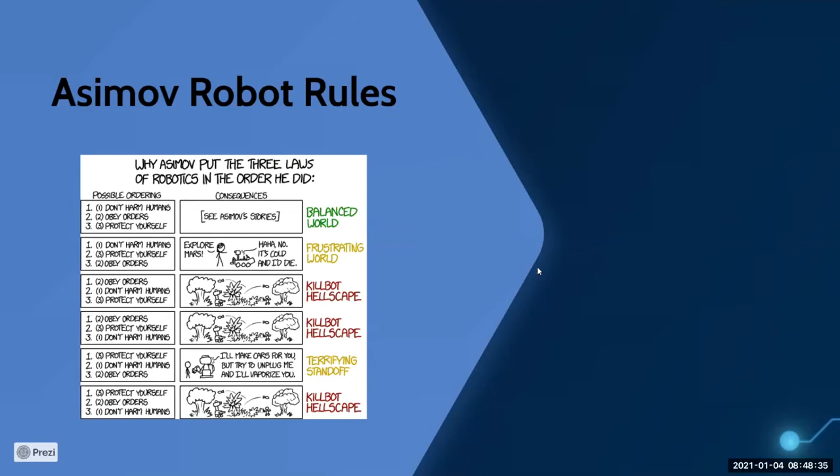Today we will talk mostly about how robots are built and work. I'll make an introduction to these 2 topics, and my friend will give more details in their speech. Building a robot at its base has 3 different parts: mechanical, electronical, and control system.

Mechanical systems are like the musculoskeletal system of the human body. Mechanical systems perform tasks by getting commands from the control systems and electrical systems. While building a mechanical system, designers consider the project's requirements about size, force, and toughness. I'll give a few examples about robotic arms. Different robotic arms need different motor forces—surgical robotic arms need more precision than force, while car assembly arms need more force.

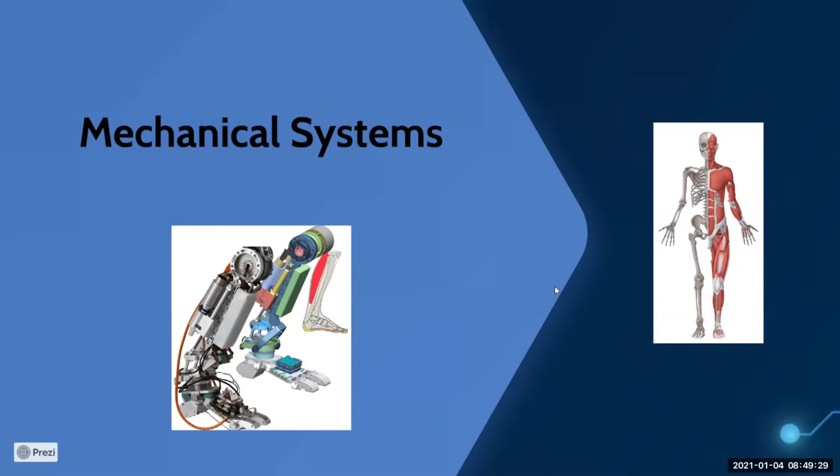Electrical systems are like the nervous system of the human body. They create, communicate, and process electrical signals between parts of the robot, and they include sensors to understand environmental conditions like distance, color and contrast, or humidity, and to understand self-states like temperature, torque, and battery level to protect itself. They deliver electrical signals to microchips for processing to produce responses.

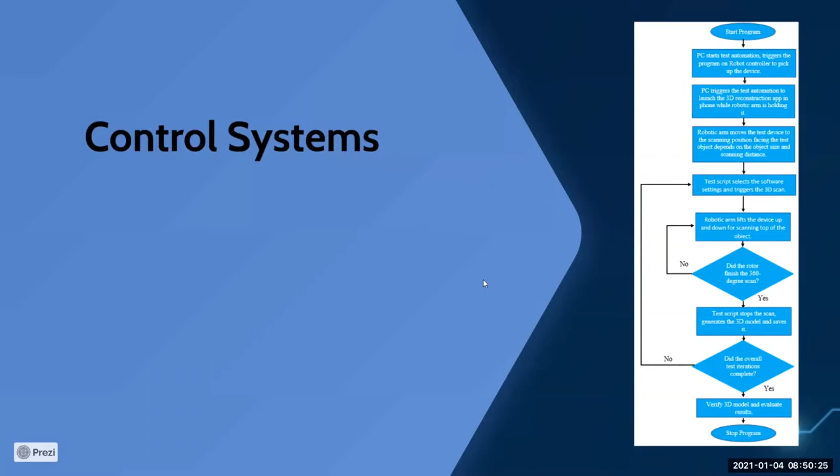Responses depend on their codes. Codes make decisions based on default situations and environmental conditions. These decision models are specified in Asimov's rules. In the code, each robot has different algorithms and different coding languages. I'm going to hand it over now—my friend Baran will talk about a different topic, consumer robotics.

We will talk about consumer robotics now. So what are consumer robotics? Consumer robots are robots you can buy and use just for fun or to help you with tasks and chores. Examples are the robot dog Aibo, the Roomba vacuum, AI-powered robot assistants, and a growing variety of robotic toys and kits. But today, me and Umut will talk about competitive robots and domestic robots in consumer robotics.

Let's begin with competition robots. Competition robots are robots which students use to improve their engineering skills by creating new technologies. There are many genres in robotic competitions—we can specify several different robotic competitions, including robocross, garbage collectors, and autonomous unmanned aerial vehicles, etc. But the most popular robots are line-following robots, sumo robots, and maze-solver robots. You can see that there are distance sensors and photoelectric sensors used in these 3 robots. Now I'm going to introduce you to these 3 types of competition robots.

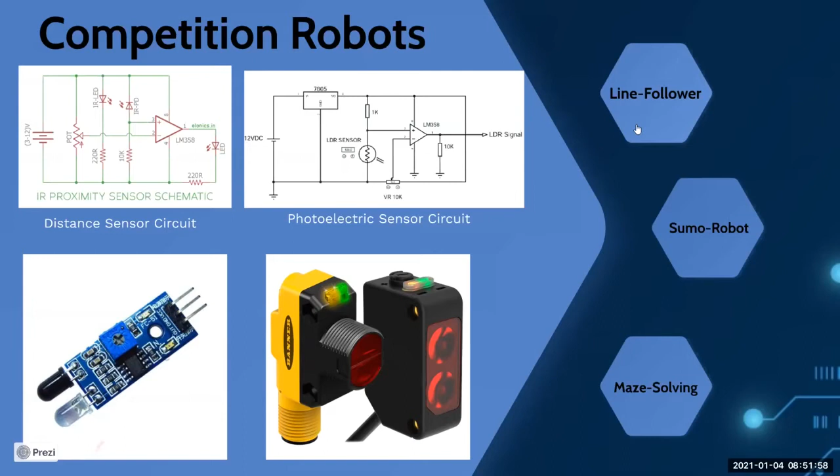The first one is line follower robots. The aim of the line following robot is to complete the track in the fastest way by using the black line autonomously after being released on the track. Thanks to contrast sensors, the engine is powered depending on whether the bottom of the robot is over black or white, and since the tracks are designed with black lines, the engine must be adjusted to move along the black line.

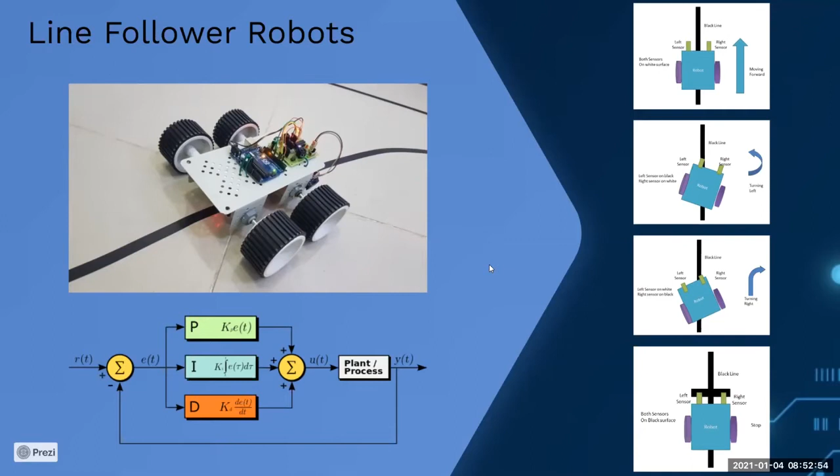There is a specific calculation, feedback calculation, PID calculation, used in autonomous machines. It's very important for line following robots. It consists of three parts: proportional, integral, and derivative. You can see the necessary calculations here. For optimum speed and accuracy, we change the coefficients that occur in PID with Arduino-based coding software. Now let's talk about sumo robots.

Sumo robots are capable of autonomous movement, containing electronic circuits designed to fight each other, programmed for intended movement. They are produced in different standards and categories. Sumo robots meet each other on a round ring called dohyo, and during the match, they try to throw each other out of the dohyo. Unlike line followers, sumo robots also have distance sensors to detect their opponent, and to compete, you need a powerful engine and wheels with friction to keep it on the dohyo.

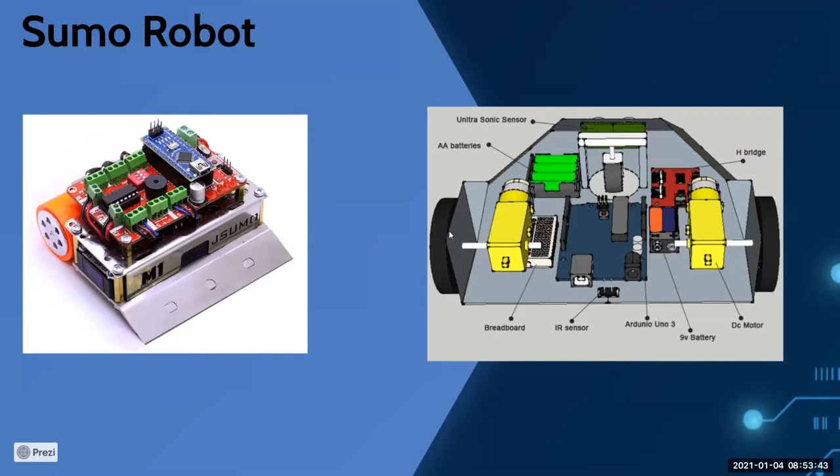And finally, maze solver robots. I'll make this short. Maze solving robots, as you can understand, their purpose is to solve the maze in the fastest way by using distance sensors all around them and a specific software algorithm. Now you can see the Arduino schematic over there.

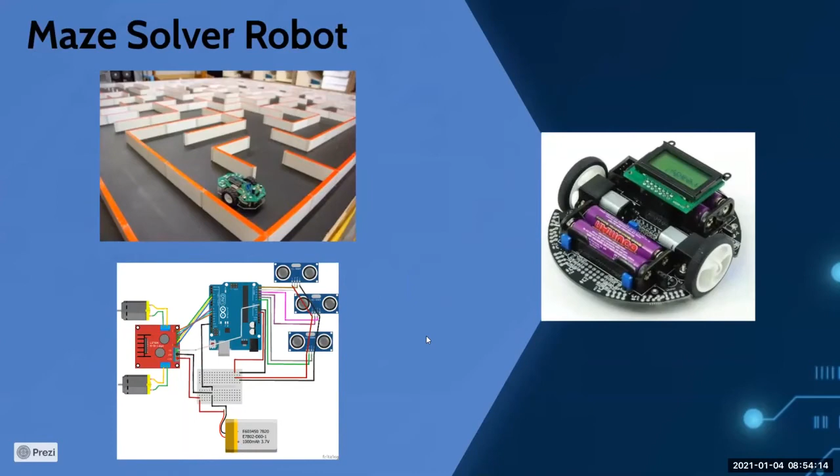Arduino schematic. Now Umut will talk about domestic robots.

Thank you, Baran. Domestic robots help us at home to make housework easier and faster. One of them is the cleaning robot. Cleaning robots are a subtype of mobile robot. A mobile robot is a robot that is capable of moving in its surroundings. There are three mental models of how a mobile robot operates.

First is hierarchical. In this part, the robot scans and analyzes the environment where it plays, then plans and takes action. Second is the reactive part, where the robot acts or reacts according to information it receives from the environment. The last part is hybrid, where the robot reacts according to a combination of these two behaviors. Cleaning robots act with this logic.

So how do cleaning robots work? There is a microchip like an Arduino Nano card inside cleaning robots. Inside this microchip, we have a circuit to help us communicate with a computer, one regulator circuit that keeps output voltage constant for increasing efficiency, and one oscillator circuit that adjusts the operating frequency of the microcontroller.

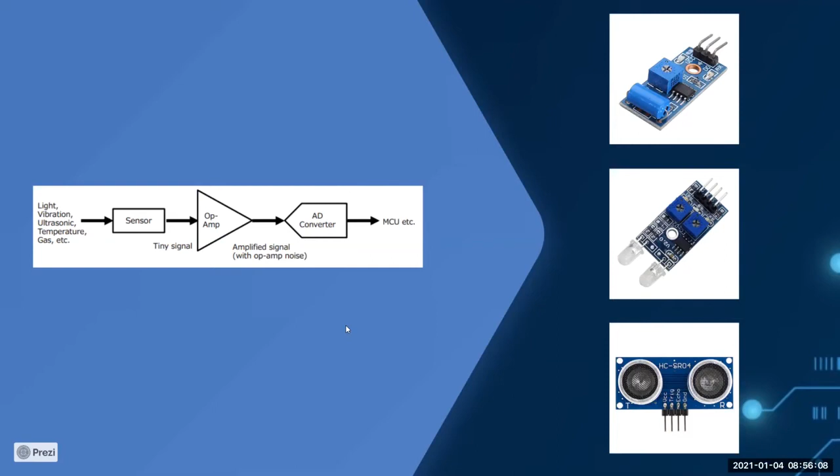Let's move on to the next topic, commercial robots. Many people think about robots mostly in the industry area. However, technological advancements have led to increasing utilization of commercial robots. There are field robots, medical robots, drones, service robots, and etc. in the commercial robot area. Today, I will talk about medical robots and drones.

In medical, we use robotic arms more than other types of robots. The medical fields where we use robotic arms are neurology, orthopedy, general laparoscopy, prosthetics and exoskeletons, rehabilitation, and etc. Now let's look at how a robotic arm works.

Firstly, in part A, we have the iHOTAS interface. It's a type of controller; it can change according to the system. Then we have DAQ. We use DAQ to adjust and operate physical variables like temperature, current, voltage, pressure, weight, etc. Also, the coding part is in the DAQ. For coding you can use C or C++, but LabVIEW is the most recommended coding app because you can make changes easily and it is easy to read.

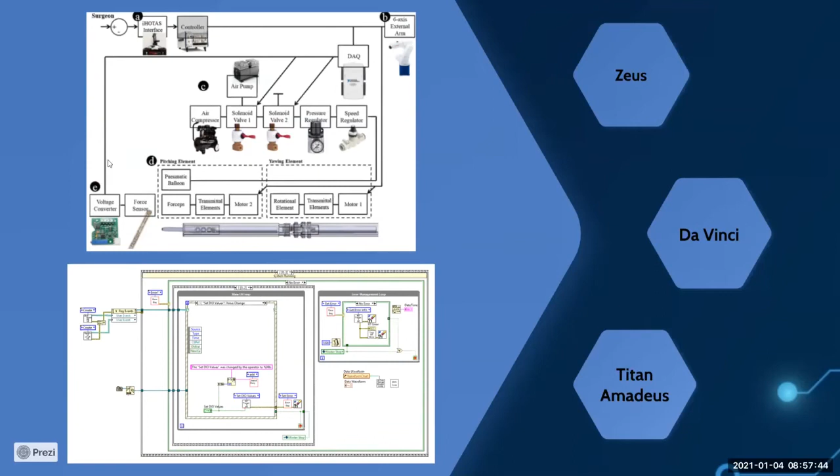In part B, we have the robotic arm. Then parts C, D, and E are controlled by the DAQ. Also, I want to give some examples of robotic arms that we use in the medical area.

The first one is Zeus. Zeus was made by Computer Motion Group. Zeus has 3 robotic arms, as you can see here. One of them is for the camera that allows the surgeon to see inside of the patient, and the surgeon activates this camera with his voice. The other 2 are for cutting, holding, and etc.

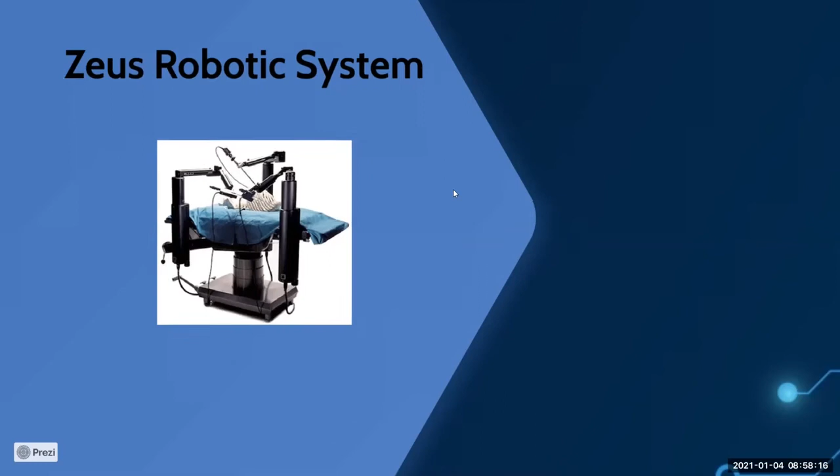The next one is the Da Vinci Robotic Arm. Davinci was made by Intuitive Surgical Group. Davinci has 4 arms; one of them is for 3D monitoring, and the surgeon operates the hands on the other 3 arms by inserting his or her fingers into a ring and using foot controls like pedaling cars.

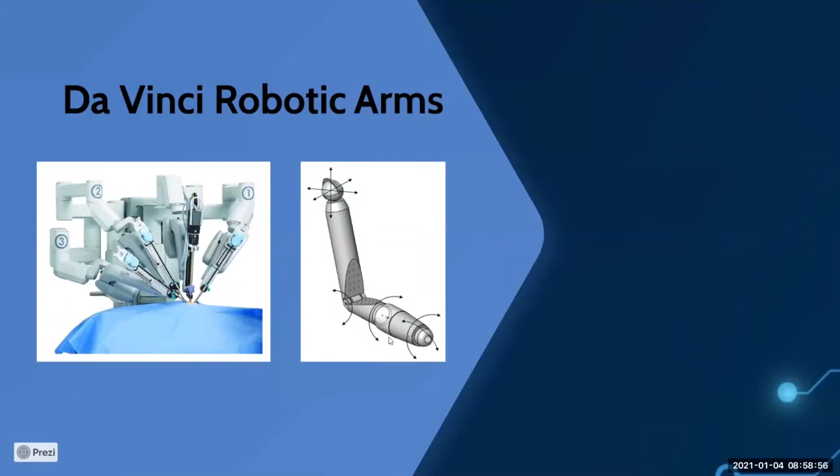Robotic arms are used to control instruments instead of direct manipulation by the surgeon's hand. With this system, arms remain steady all the time, and it eliminates the shaking of human hands electrically. Davinci has 7 degrees of freedom, and it also has a simulation that teaches how to use the console.

And lastly, Amadeus. It was made by Titan Group. Amadeus is almost the same as Davinci, but they have some differences. Amadeus uses snake-like multi-articulating joint arms, and its system is designed to make teleoperations easy for long-distance surgery.

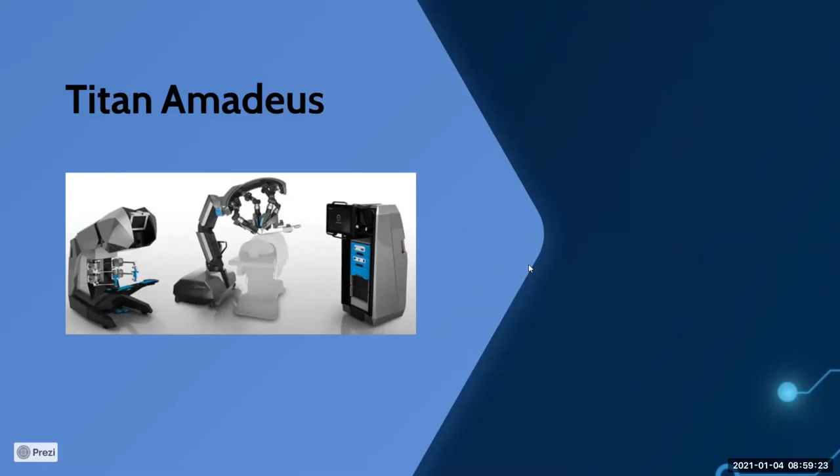Let's move on to the other topic, drones. A drone is an aircraft without a human pilot, and its system is a system for communication between controller and vehicle. So how do drones work? I will explain this over a quadcopter layout for better understanding. A quadcopter is a type of drone with 4 propellers.

Quadcopter has 4 motors, and these motors are positioned under the propeller, controlling the propeller's rotation and speed. Then we have a speed controller for each motor. The speed controller controls the speed and adjustment of the motors. Also, speed controllers are connected to motors with 3 wires called phase wires: red for positive, black for negative, and yellow for signal.

And then we have a battery. It is actually a lithium polymer battery because it is light, small, and contains a lot of power. Of course, it can change according to the drone we use.

Next is the drone's brain, the flight controller. It is inside the Ardupilot here. It has tons of different sensors that allow for flight control algorithm and flight stabilization. If you want to put a cam or video transmitter, you need to connect them with a flight controller, because the flight controller has special ports for them.

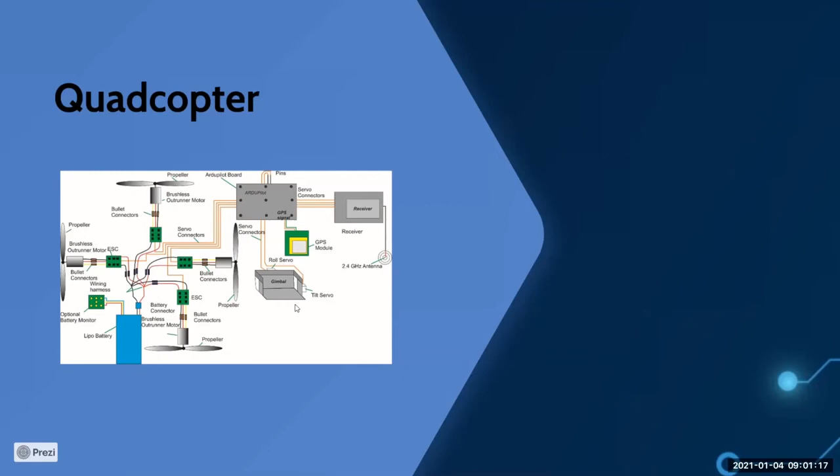Then we have the receiver. We need to connect the receiver with an antenna to a remote control transmitter to control the drone. Then we have the gimbal, which keeps the camera at the same angle as the drone, regardless of the drone's movement. Lastly, the GPS module, which makes things easier for long distance driving.

Now Baran will talk about industrial robots. Thank you, Umut. Industrial robots are fully autonomous robots used to increase efficiency and speed in jobs that are physically difficult for people to do. Although many robots are used in this area, the most common are industrial robotic arms. These robotic arms, used in fully autonomous factories, perform their tasks synchronously in the factory.

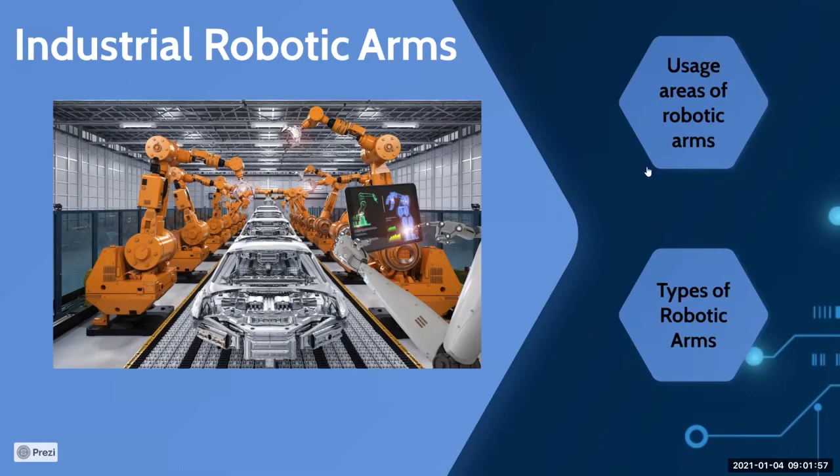Now I want to give you information about the usage areas of robotic arms. The first one is speed. Particularly when choosing robotic arms for picking and placement applications, it is important to pay attention to manufacturer ratings for speed. Changes and upgrades to speed ratings can be achieved in some types of robotic arms through changes made to the choice of belts, motors, or actuators used.

The second one is load. All types of robotic arms have a given load capacity. Different sorts of robot arms are supported by different design frameworks, which can increase or decrease overall load capacity. This must be balanced with consideration of physical placement and footprint. I chose just these 2 because I think they are the most important ones.

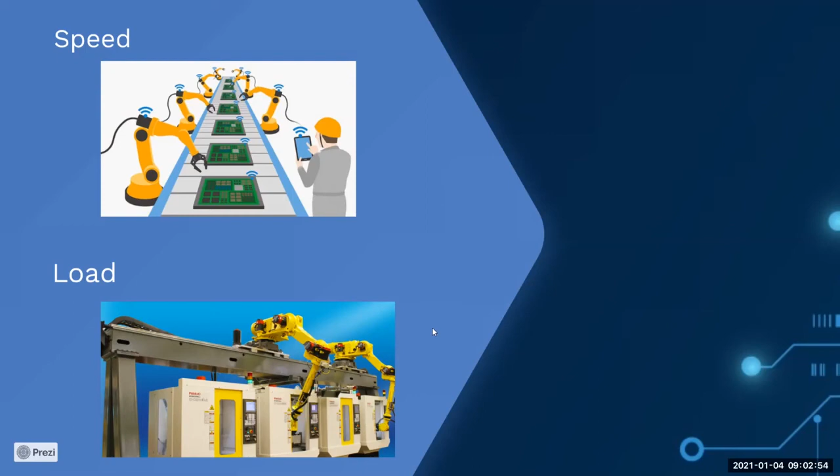Now let's move on. How many types of robotic arms are there? The first one is Cartesian robotic arms. In robotic arms terms, the mechatronic Cartesian or gantry robot tends to consist of 3 articulating joints programmed using X, Y, and Z coordinates, moving linearly along these 3 axes. They can be mounted horizontally, vertically, or overhead, and are widely used in applications such as machining parts or picking and placement alongside conveyor belts. You can see the joints and the axis here.

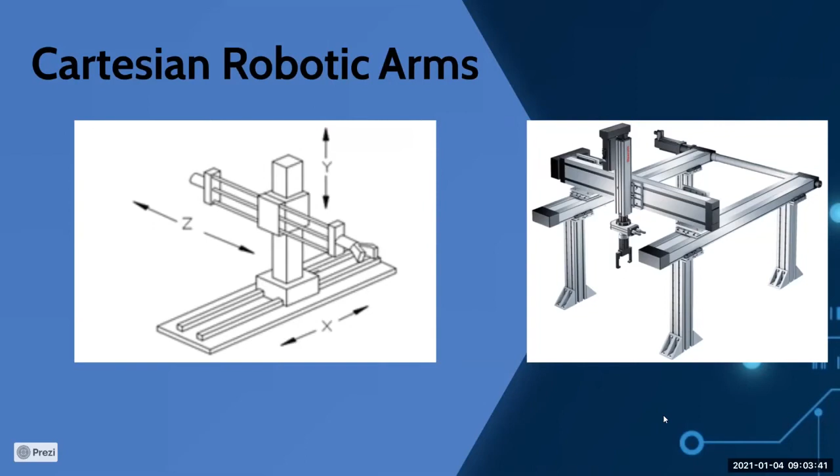The second one is the cylindrical robotic arm. Cylindrical robotic arms, in contrast to the Cartesian version, are ones whose axes form a cylindrical coordinate system. In short, their programmed movements take place within a cylindrical shaped space, with up and down and rotational movements. They are used in areas like spot welding and machine tool handling, where the rotary and prismatic joints give it both rotational and linear motion. You can see the working logic over there.

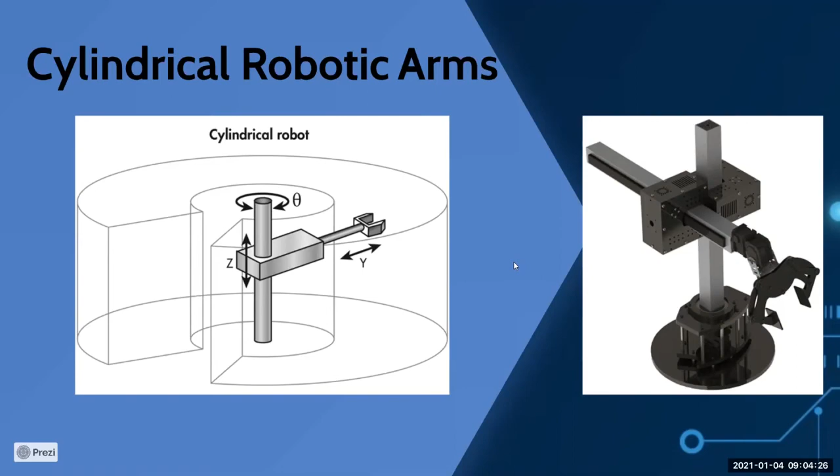And lastly, polar and spherical robotic arms. Just like the cylindrical arms described before, a polar or spherical robot is one that operates within a spherical or polar locus of movement.

This is achieved through a combined rotational joint, two rotary joints, and a linear joint. The polar robotic arm is connected to its base via a twisting joint, giving it a spherical workspace. It has axes that make it useful for performing similar roles as cylindrical robotic arms.

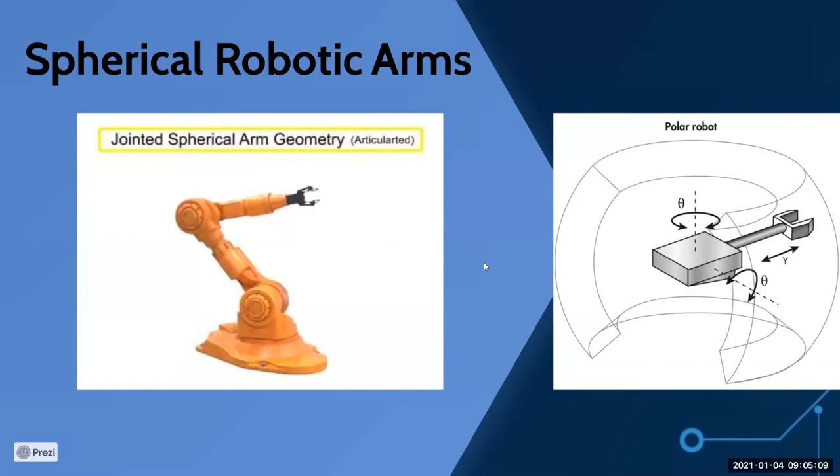From now on, BG will keep going with autonomous cars. Hi guys, now I'm going to talk about autonomous vehicles and its details.

The first thing I want to explain is what an autonomous vehicle is. An autonomous car, also known as a self-driving car, is a vehicle capable of sensing its environment and operating without human involvement. A human is not required to take control of the vehicle at any time. An autonomous car can go anywhere a traditional car goes and do everything that an experienced human driver does, but of course under certain conditions.

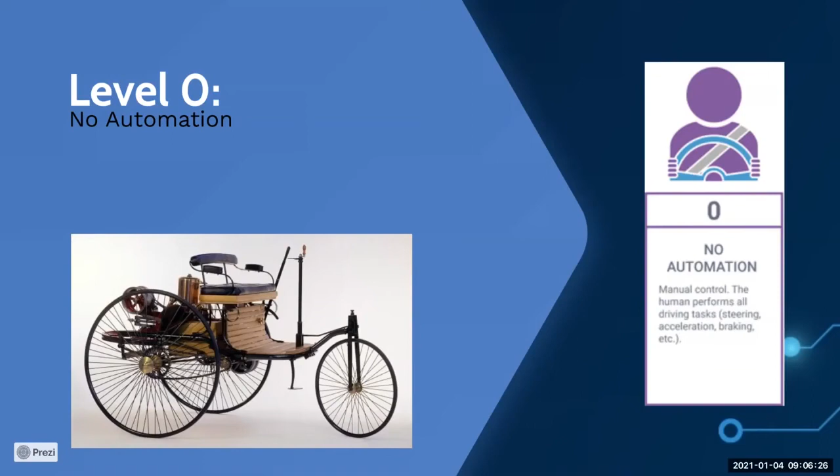In level 0, which is no automation, the driver completely controls the vehicle at all times. The driver monitors the road, decides when to speed up or brake, and monitors surroundings, so there is no automation.

In level 1, the vehicle features a single automated system, monitoring speed through cruise control, automatic brakes, and lane assist. In level 2, at least 2 controls can be automated in unison, such as adaptive cruise control combined with lane keeping. Adaptive cruise control is an intelligent form of cruise control which slows down and speeds up automatically to keep pace with the car in front of you.

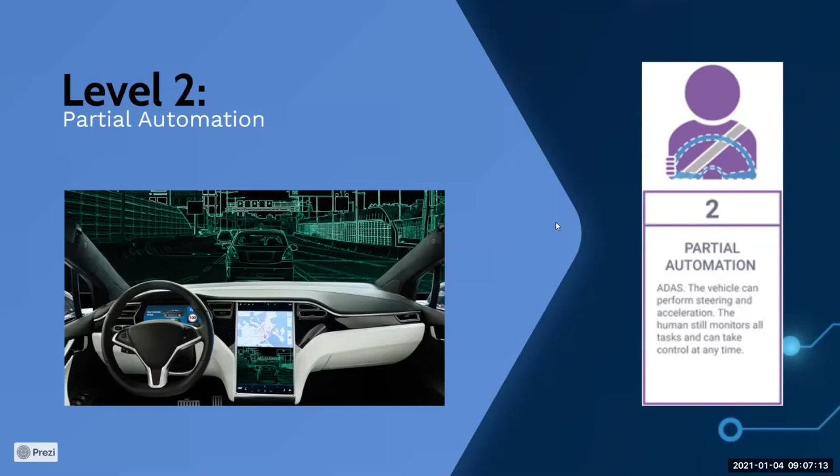Here, the human still monitors all the tasks and can take control at any time. Up to this part, the human monitors the driving environment. After these levels, the automated system monitors the driving environment.

In level 3, which is conditional automation, the car can manage all safety critical functions under certain conditions, but the driver is expected to take over when alerted. Automation has environmental detection capabilities, but human override is still required.

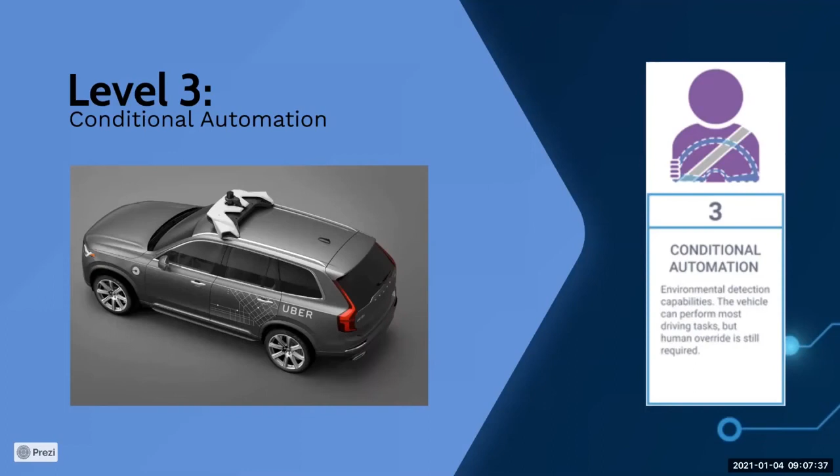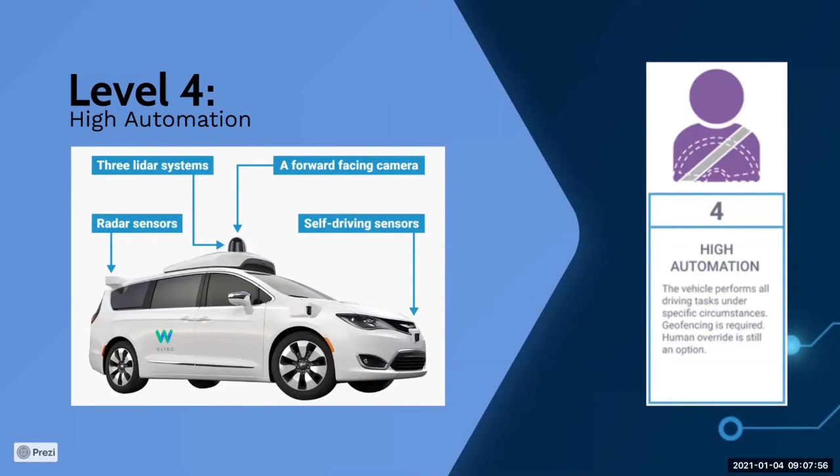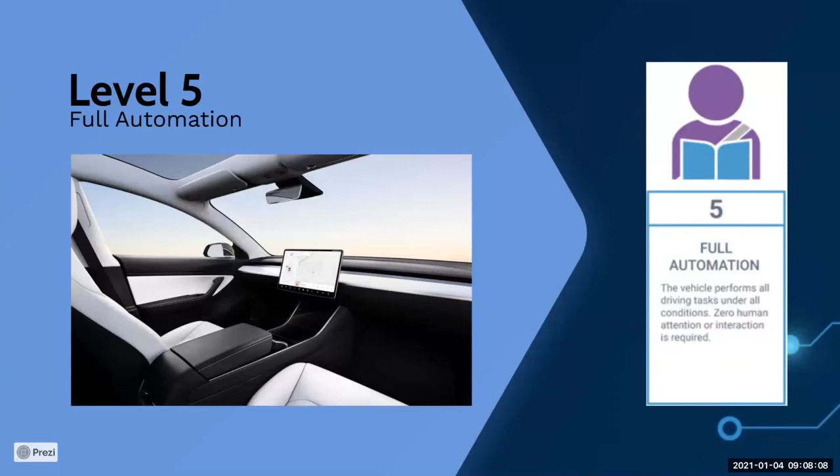And lastly, full automation: the vehicle includes humans only as passengers, so there is no human interaction and no human attention needed. The car is completely capable of self-driving in every situation.

Currently, there are no legally operating fully autonomous vehicles in our life. There are, however, partially autonomous vehicles, such as cars and trucks with varying amounts of self-automation, from conventional cars with brake and lane assistance to highly independent self-driving prototypes.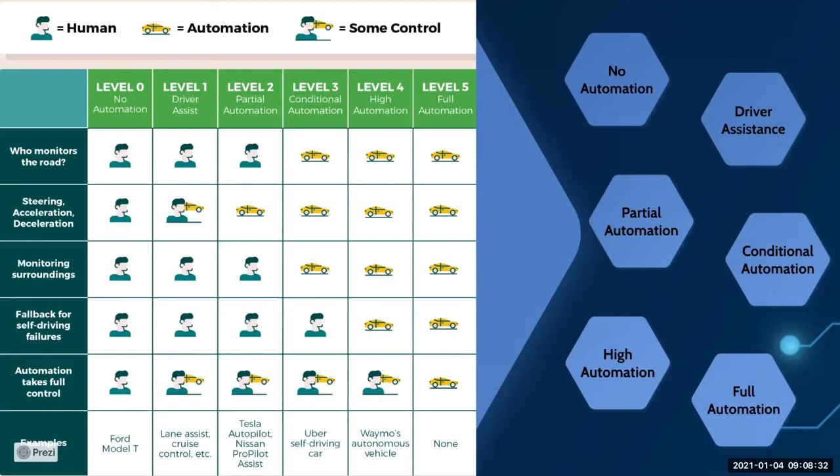I have talked about levels up to this part, so how do these cars work? What kind of technologies do they have? Autonomous cars rely on sensors, actuators, complex algorithms, machine learning systems, and powerful processors to execute software.

When we look at the technology part, we encounter a very complex and interconnected system. Self-driving cars include a significant amount of technology. The hardware inside these cars has stayed consistent, but the software behind the car is constantly changing and being updated. Fully autonomous cars are still undergoing testing in several parts of the world, but none are yet available to the general public.

So these are some primary technologies. I have 5 of them. In the hardware parts, we have radar, LiDAR, camera vision systems, complementary sensors, and connectivity.

Radar detects and tracks the presence, direction, and speed of objects using radio waves. LiDAR provides extremely accurate depth perception information to the car by shooting lasers and receiving reflection data to create 3D models of surrounding objects.

Computer camera vision systems offer high resolution and detail to recognize surroundings most accurately. Cameras are best for training machine learning models, but they are not ideal for calculating depth perception. Complementary sensors are like microphones enabling the car to pick up audio, such as emergency sirens. And lastly, connectivity.

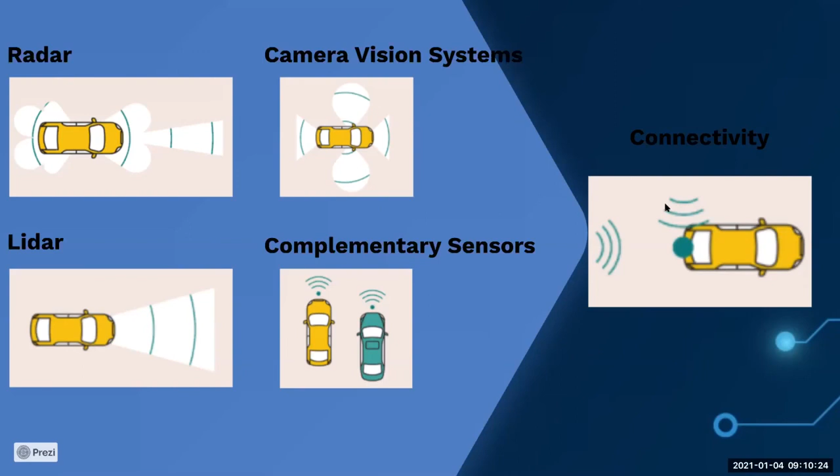External source of the truth aids self-driving cars with maps, construction, traffic, weather conditions, and adjacent cars. Now, the software part. Here we have a bunch of algorithms, but I have 4 of them.

Regression algorithm is used for detection and localization and predicting movement. Decision-making algorithm is used for decision-making. It uses multiple models to help recognize and make appropriate decisions.

Pattern recognition algorithm is used for object recognition, and it helps reduce the data set by finding patterns and commonalities. And lastly, clustering algorithm is also used for object recognition, and it uses structures in data to organize data into groups based on commonality. Now, let's look at how all these stuff work when combined.

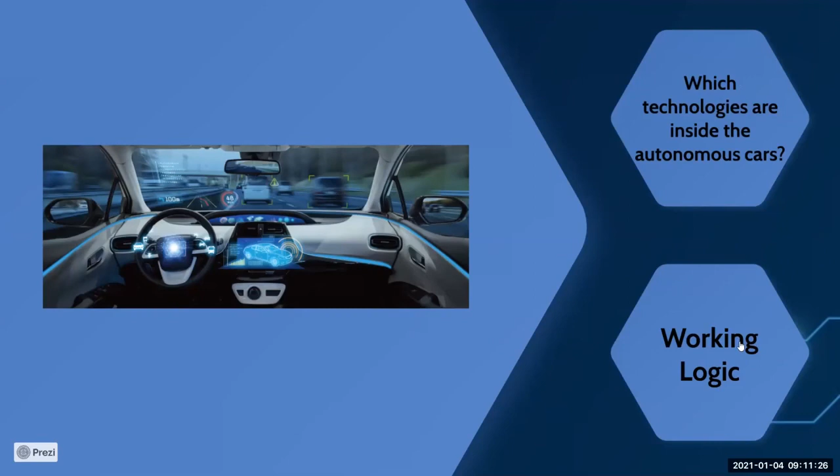Here we have computer vision. The vision system is the eyes of the car. This picture shows how the car sees its surroundings and how it identifies objects.

Localization: the car uses numerous vision sensors combined with readings from high-tech GPS to figure out exactly where the car is in the road. Then path planning. This system takes all the information about our surroundings and makes a decision about which way we need to go to get to our destination. And lastly, control.

The process of physically moving the car according to the decisions made in path planning by constantly adjusting the steering, accelerating and decelerating. Based on the path planned in the previous steps, the car has concluded the set of waypoints it will follow in its journey to the desired destination.

Now, let's look at the useful and harmful effects of autonomous vehicles for us.

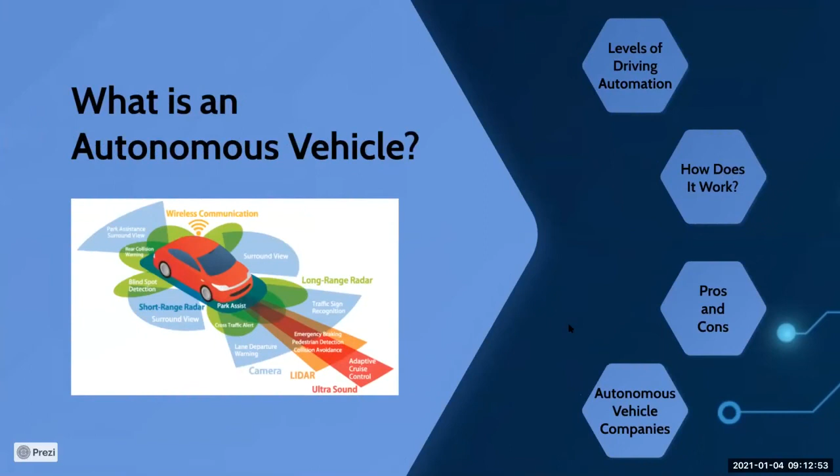Different segments of society have different arguments to legalize it or inhibit it. Traditionalist negative arguments are the risk of damaging people. They defend the idea that the morality of autonomous cars is a big problem for them.

All we know is the trolley dilemma. We have to decide what an autonomous car has to do in a similar dilemma. After a possible incident, the judge's decision is an open question. Who is guilty? The programmer of the autonomy, or the driver who trusted the autonomy? You can share your opinion in chat.

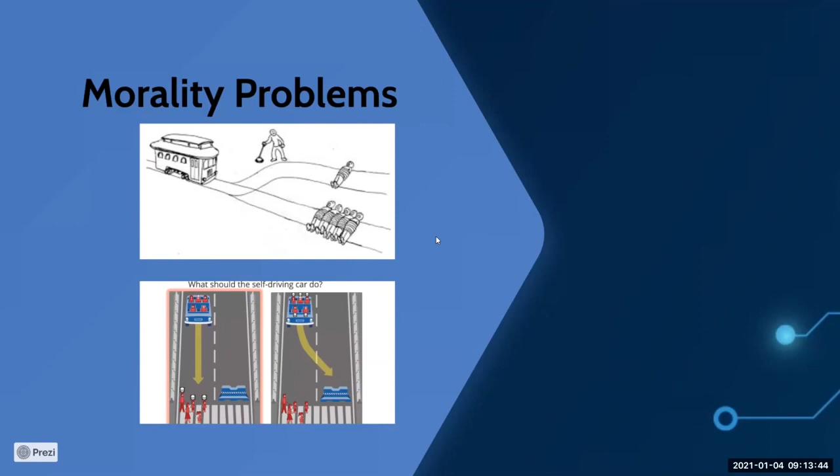On the other hand, every software could be hackable. A black hat hacker group could easily hack all cars in traffic and they could use that for their goals. Fast and Furious fans can remember a similar scene, where a hacker group attacks a politician via the cars on the road.

That's enough, there is not only bad parts. Reformists' positive arguments are interested in the ability of the robot. They can work 24/7 with the same motivation. They make fewer mistakes than humans and they can learn to drive better.

And the last point I will talk about is autonomous vehicle companies. Autonomous vehicle companies are mostly USA-based startups. Different companies have different approaches on autonomy.

Tesla is a company that builds the most popular electrical cars in the 21st century. Tesla has had 3 different autopilot substructures over time. The first one, Mobileye, appeared in 2014 and was used for just 2 years. Mobileye is an Israeli company cooperating with Intel. Mobileye develops vision-based self-driving cars and ADAS.